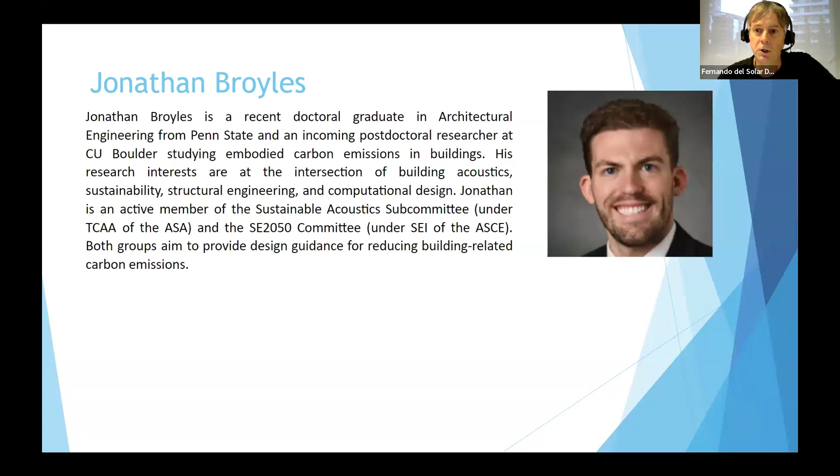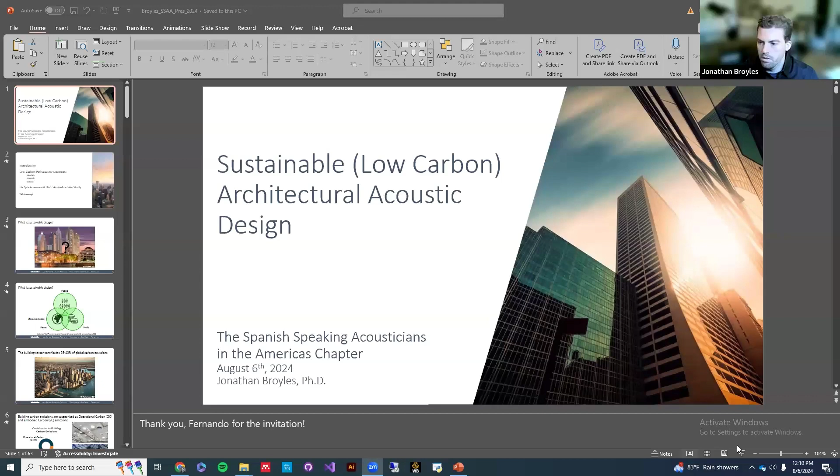I will stop sharing here. Okay, well, thank you so much for having me. I'm going to go ahead and get the slideshow on. You guys should hopefully be able to see the slide deck. So, good afternoon, good morning, or good evening, depending on where you are. I'm happy to be presenting on sustainable, low carbon architectural acoustic design to you today. Again, thank you, Fernando, for the invitation.

So a little bit of an overview of what I'm going to be talking about with you guys today: I'll give a little introduction on what I mean by sustainable design and low carbon design. I'll then discuss a couple low carbon pathways for acousticians or acoustic engineers, whether through structural systems, building elements, building materials, or systems like mechanical systems or the facade and building envelope. I'll then talk about what life cycle assessment is, what I mean by LCA, and how we can actually use this method on a case study looking at floor assemblies. Finally, I'll give a few overarching takeaways from the presentation.

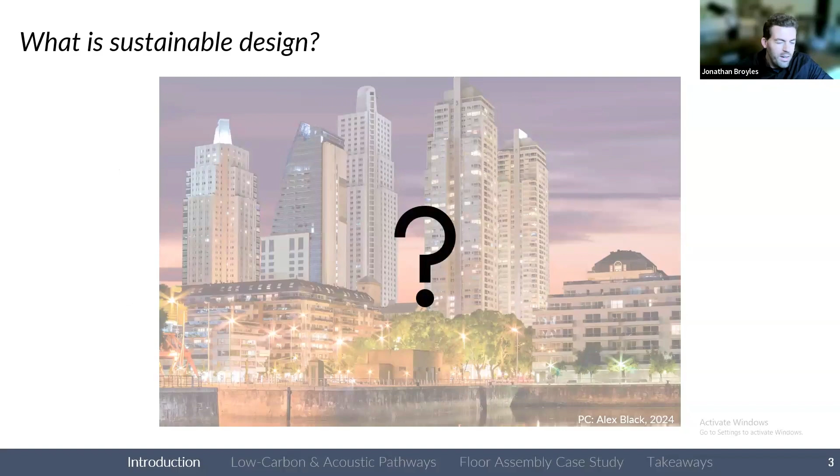So I don't know where your background is with sustainable design. You might be curious what exactly I mean when I say sustainable design. Sustainability with regards to the built environment aims to reduce the negative impacts on the environment, the health and comfort of building occupants or people, while ensuring an economical design.

Sustainability has three core pillars, known as the triple bottom line, or the three P's: to help the people, help the planet, and gain a profit.

I first want to mention that acoustic consulting was known to be a sustainable practice because it benefits people. People having acoustic problems would want to talk to an acoustician to make sure people aren't inadvertently affected. But by and large, a lot of people are now focusing on decarbonizing the planet—not to disregard people or profit, but there's a bigger push on trying to reduce building carbon emissions.

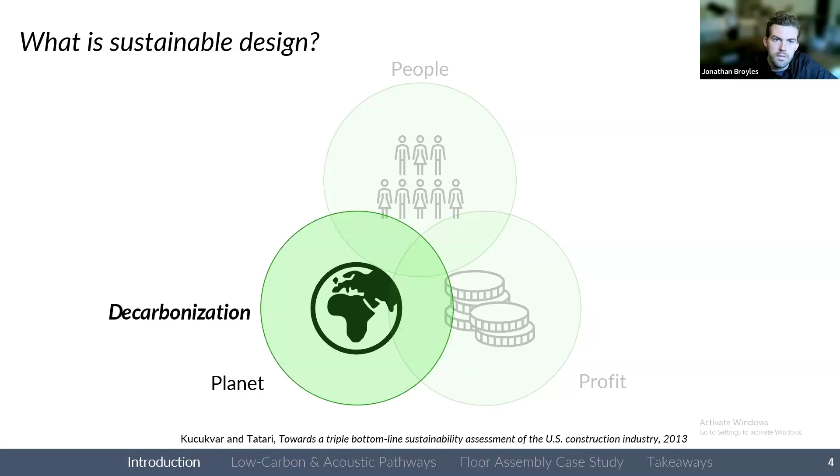That's because the building sector, and specifically the architectural, engineering, and construction industries, contribute between 35 to 40% of global carbon emissions. And there's a pretty big global climate crisis. So as building designers and practicing acoustic engineers, we have to figure out ways to curb the carbon emissions of our buildings.

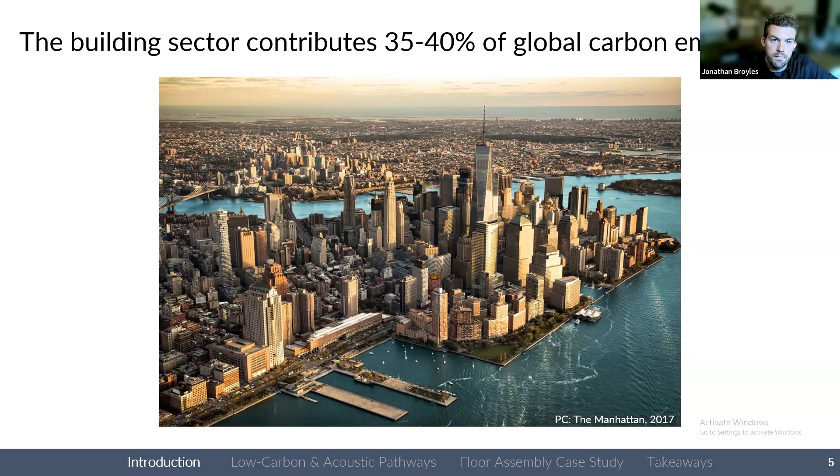To break this down, building carbon emissions are typically categorized as operational carbon emissions and embodied carbon emissions. Operational carbon emissions are associated with any carbon emission connected to keeping the building lights on or keeping the building in use—keeping the mechanical system running, having the lights on, and typical day-to-day operations.

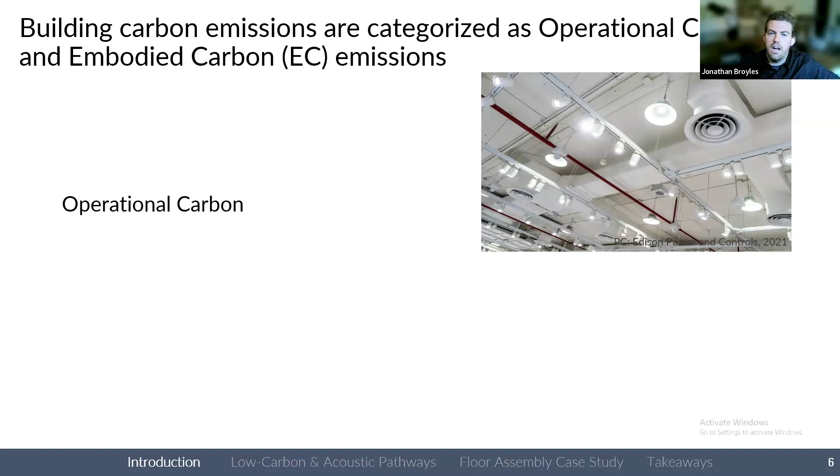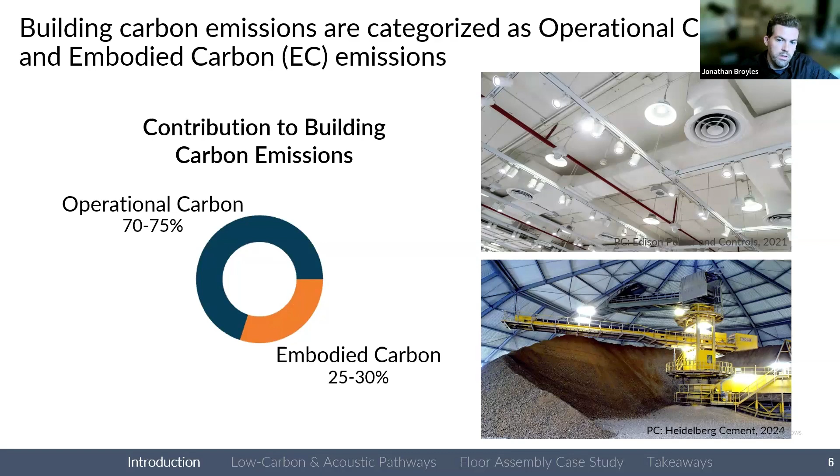Embodied carbon emissions are essentially the carbon emissions from material extraction, transportation, and manufacturing of building materials, such as concrete, steel, wood, or even plastics. Typically, the contribution to total building carbon emissions is about 3/4, or up to 75%, connected to operational carbon. The remainder is associated with embodied carbon emissions.

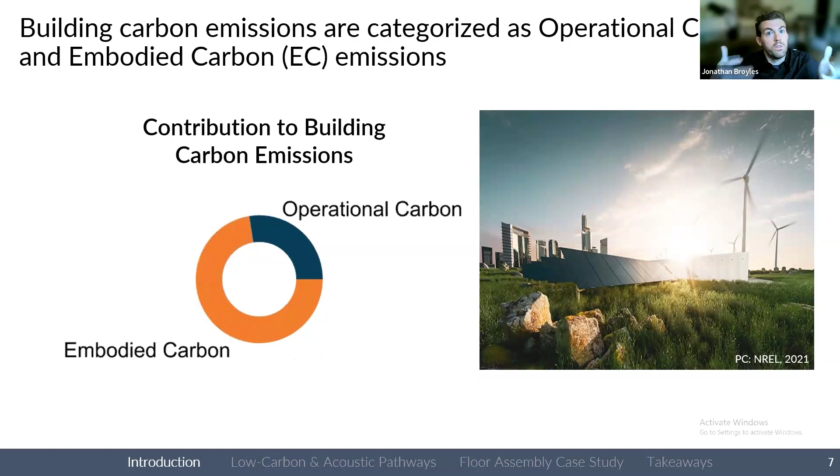Especially in places progressing towards renewable energy sources, with greener electrical grids, it's projected that the contribution to embodied carbon emissions will change, becoming a bigger piece of the pie, so to speak, because operational carbon emissions are going to be, in quotes, greener. So as designers, we have to be aware of trying to reduce both operational and embodied carbon emissions.

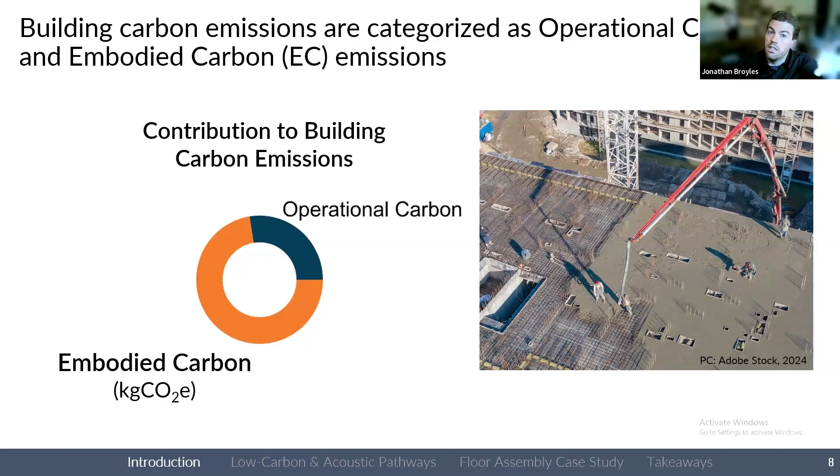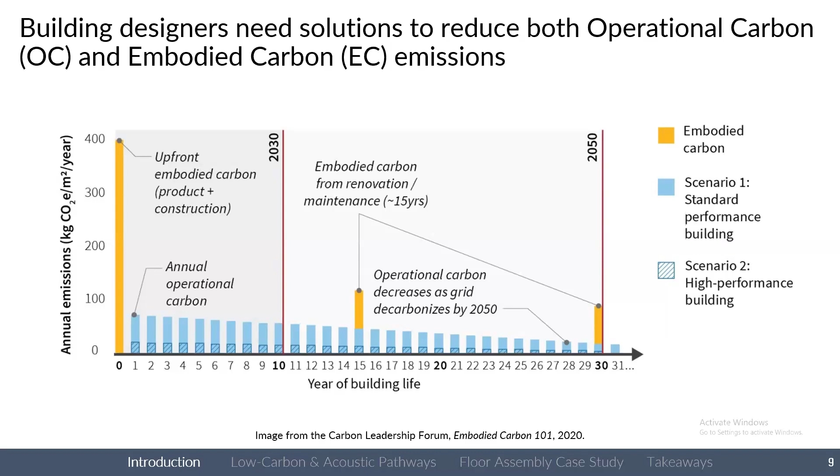Typically speaking, we have a lot of different carbon emissions to consider in the design of a building. There are carbon dioxide emissions produced at every building life cycle stage. Typically when we think of reducing carbon emissions in buildings, we're focused on operational carbon emissions, but in reality, we have to think about the materials and products we're using as well.

Hi, Fernando. Did I get cut off? Hopefully not. You did not. Okay, perfect. I just saw a little blurb come up, but okay, good.

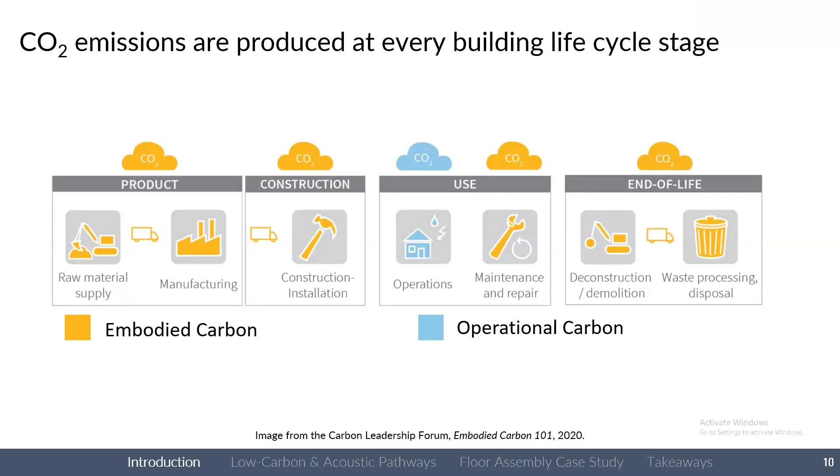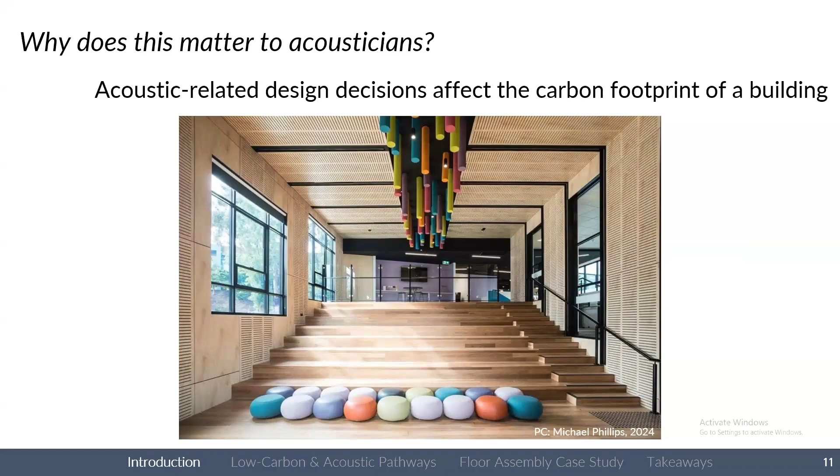So why does this matter, specifically to acousticians and other practicing building designers? That's because acoustic related design decisions can affect the carbon footprint of a building, whether that's how we specify building finishes or different floor assemblies, or specifying acoustic baffles in certain places, or the design of our HVAC system. All of these design decisions have carbon consequences, whether good or bad, so we have to be very aware of the carbon footprint related to those design decisions.

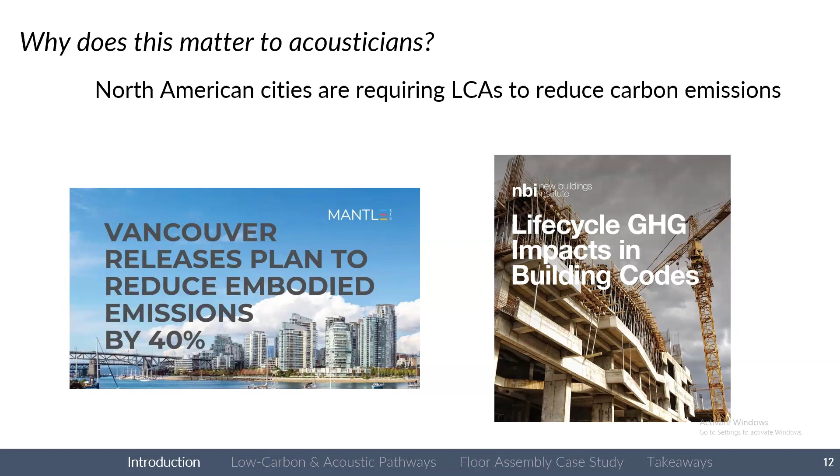So I'm going to shift gears a little bit, given that motivation, to some practical strategies—a bit more academic and innovative—pathways to reduce embodied carbon emissions and operational carbon emissions in buildings. I'll start with strategies to reduce embodied carbon emissions first.

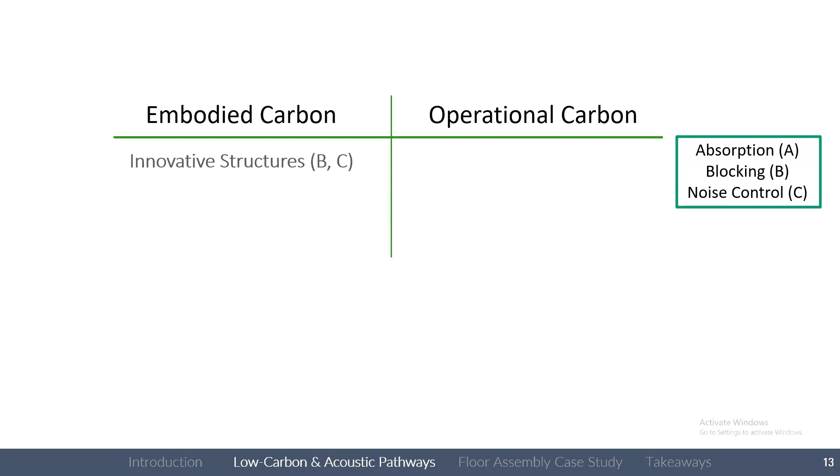These include innovative building elements or structural systems, including green roofs—I'm sure people on this call are pretty familiar with green roofs. Mass timber building structures are becoming very mainstream across the world, and even geometrically optimized elements are a strategy to reduce building embodied carbon emissions.

Moving on to operational carbon, designing very carbon-efficient systems, including high-performing building envelopes and optimized mechanical systems, is a pathway to reduce our operational carbon emissions.

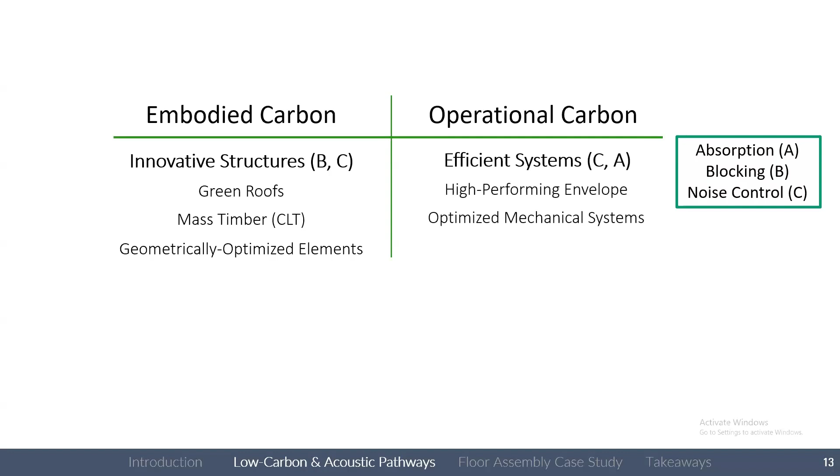There's also a mix of benefit when specifying sustainable materials—that could be material-optimized structures, getting into the material science of a specific construction material, specifying greener conventional construction materials, and even using natural, especially local biogenic materials. That's a very good pathway to reduce carbon emissions in buildings.

Depending on what type of pathway you select, that has a direct effect on how well you're absorbing sound in a building, how well you're blocking sound, or what type of controls you have in terms of the acoustic system in your building.

That's one reason mass timber floors are becoming a mainstream solution to reducing embodied carbon emissions in buildings in many countries. Something to be aware of though—as acousticians, we know mass timber floors, especially without other material layers applied, don't have the best acoustic performance. However, it's a very sustainable design solution.

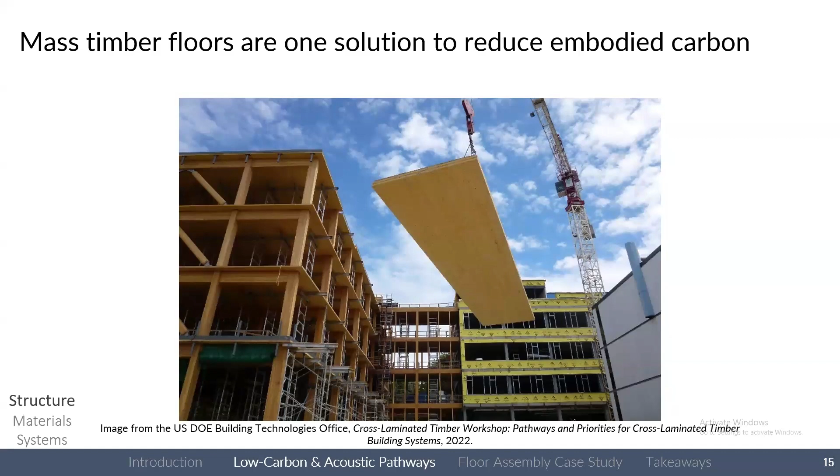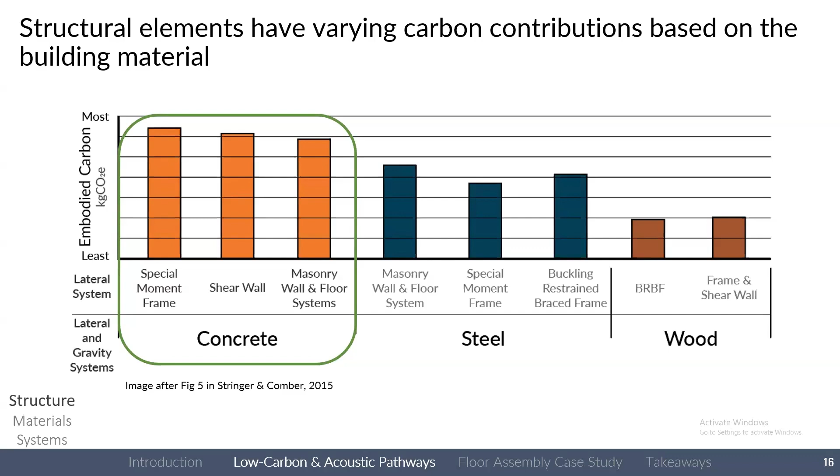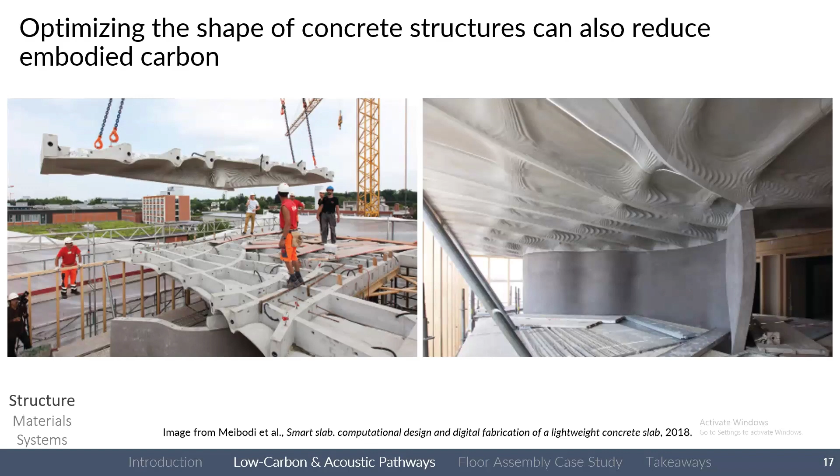Another pathway is to optimize other structural systems, including concrete systems. There's been a lot of research on optimizing the shape of concrete structures or elements in buildings without sacrificing their structural integrity. These pictures show a 3D concrete printed floor slab implemented in a building design—the benefit is much less concrete in the floor compared to a conventional concrete system, thereby reducing embodied carbon emissions.

But depending on how much STC increase we need, that can affect embodied carbon emissions. There's a trade-off when reducing the mass density of a floor system, which can also affect the stiffness and damping of the floor, thereby affecting sound insulation performance.

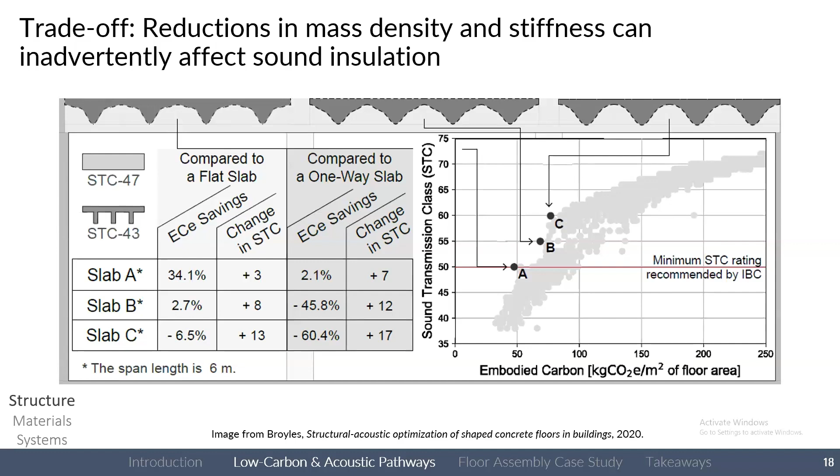So you have to be very aware when you're doing this pathway, and I know this is more scientific, more advanced, when actually specifying these optimized floor systems in building design. I know these systems aren't super mainstream yet, but there are tests being done, and I've done some of them. There's also startups coming out with these types of floors that can reduce the carbon emissions of a building, but can sometimes have a benefit to the acoustic performance, or inadvertently affect it. So as designers, we have to be pretty aware of this when implementing them in building design.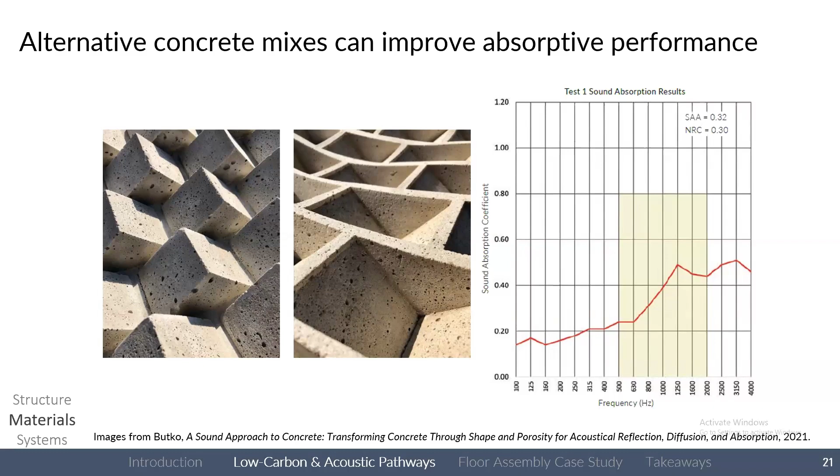Stepping away from concretes, natural, local biogenic materials can really help reduce the carbon footprint in your building while also improving acoustic performance. Some of this isn't new to you guys, or shouldn't be. Using construction materials like straw bales, compressed earth blocks, cork, and hempcrete can all have benefits when reducing carbon emissions while also improving acoustic performance, like having higher absorption in your building. So definitely look to try to implement these.

And I know it could be very much case dependent. Maybe you have a residential building, natural local biogenic materials might be a great option for you, but for other multi-story buildings, maybe it's a little bit harder to implement this strategy or pathway.

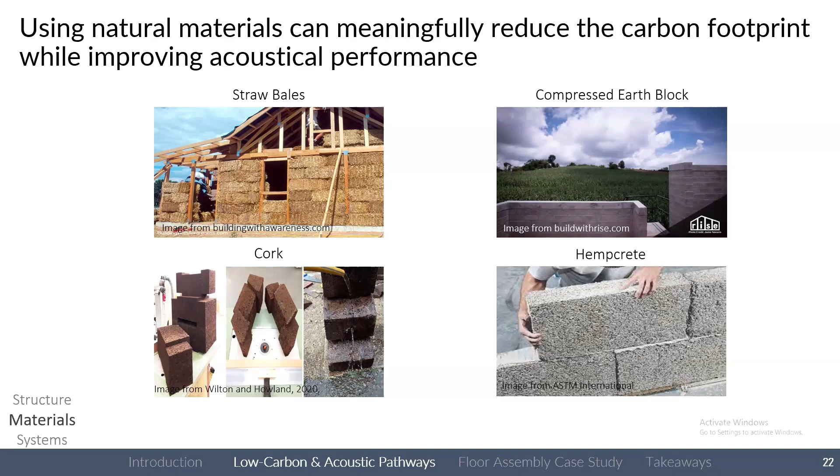One important trade-off when implementing local biogenic materials is that sometimes there are construction limitations with these. There's also degradation issues, meaning depending on if it's potentially in a fire-prone area, or if there's a lot of water that it would be exposed to. These are things to very much be aware of because that can ultimately affect the life safety and quality of your building. So not only do you want something that's low carbon and acoustically viable, you want to make sure the material is safe and there wouldn't be any life safety consideration with it.

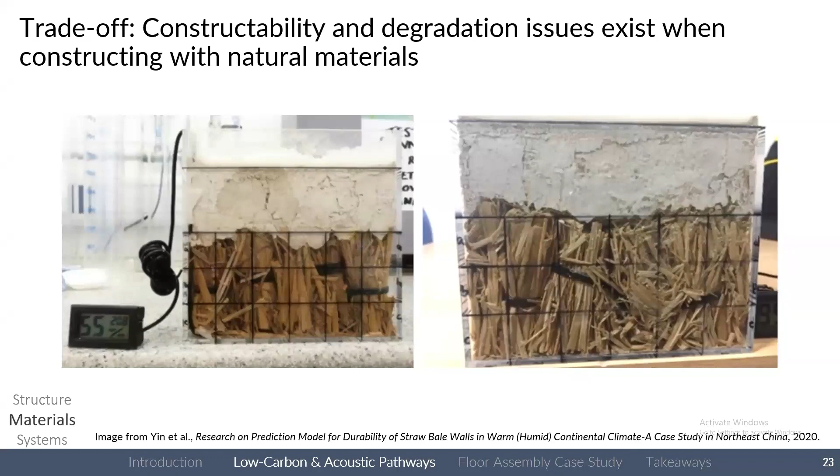Moving on to systems, I mentioned high performing building envelopes, and that really comes down to windows. If anybody is familiar with double pane and triple pane windows, hopefully there are a few consultants here on this call familiar with those, there's not only an acoustic benefit, but there's a pretty big operational carbon benefit as well.

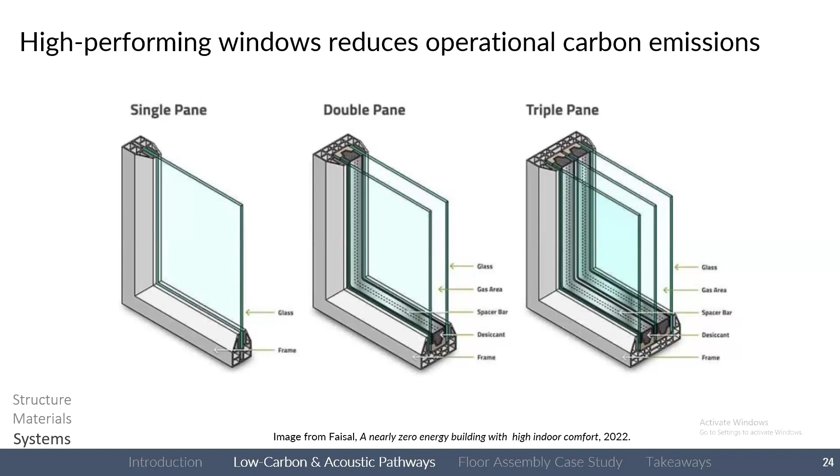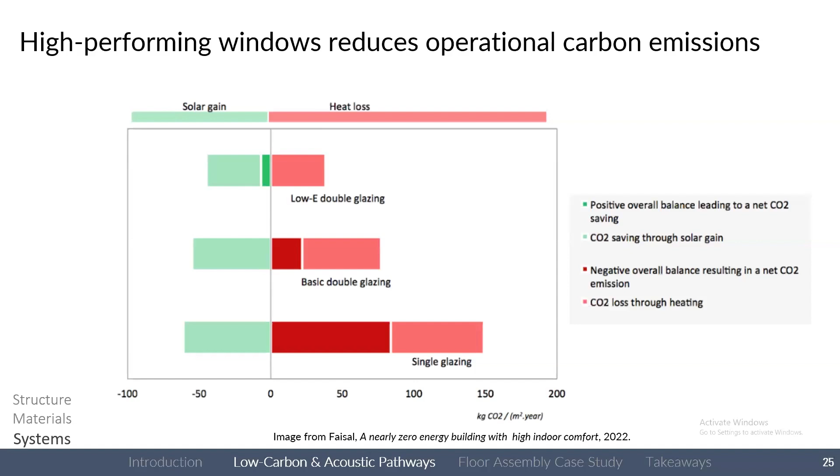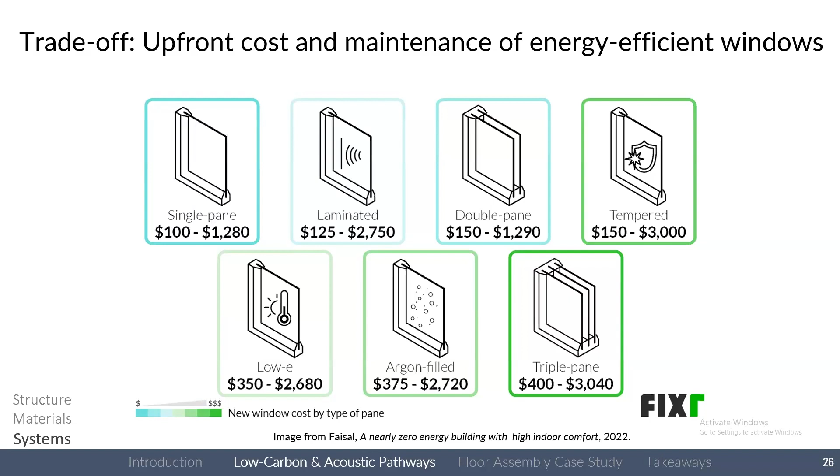Now, the trade-off with these types of windows, or higher, more efficient envelopes in general, is there's generally a larger upfront cost connected or associated with windows or even better, more energy efficient mechanical systems. There's also potentially more maintenance involved with the upkeep of these systems. You can see here pretty clearly, double and triple pane windows are a little bit more expensive. The double is not too bad, but the triple is when you really see a much larger cost.

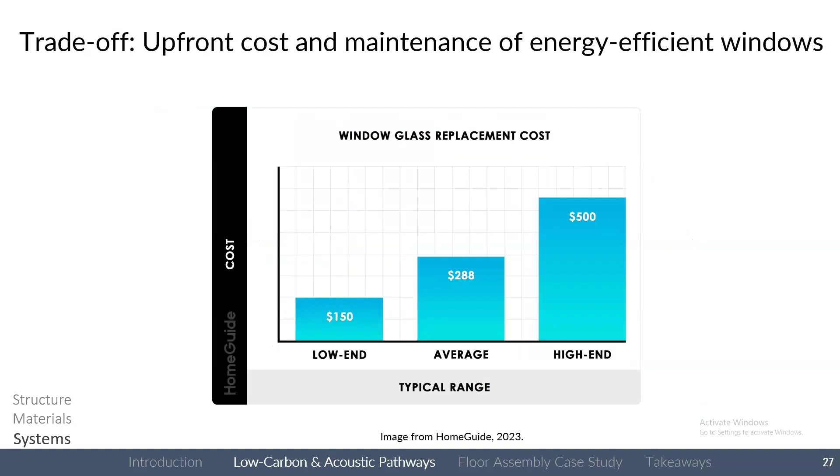And then again, the upkeep of these can be very high, especially depending on how many windows you have in your building design. Are they high end? All of that has to be considered when you're designing your building.

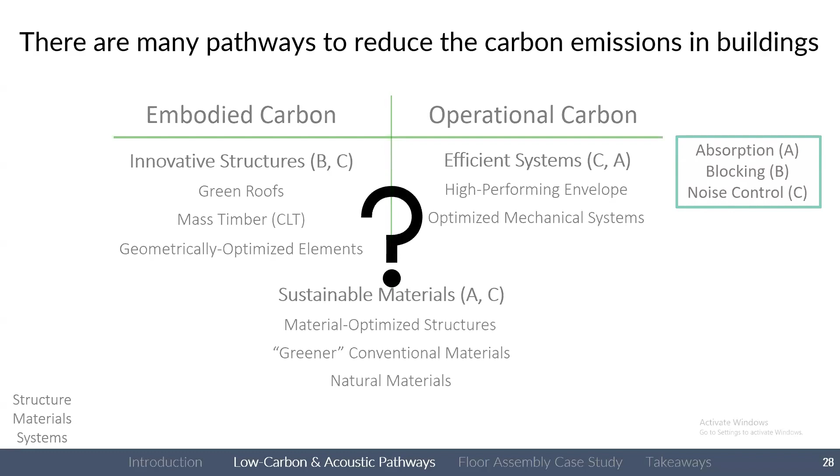So I'm going to pivot now after talking about all of these different pathways. Hopefully some of us are already familiar with some of these pathways even before this call, but hopefully all of us now have a few ideas of how to reduce building carbon emissions. But now I want to talk about how do we actually pick which solution is best and how do we know?

So I'm now going to give a short mini lecture on what is life cycle assessment, what is this method, and then actually demonstrate using a life cycle assessment to evaluate different floor ceiling assemblies for both their carbon emissions and their acoustic performance.

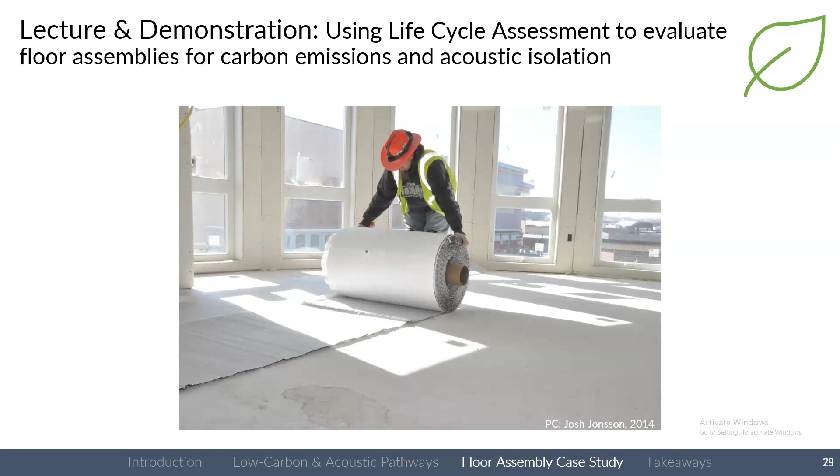Okay, so what is life cycle assessment? Maybe you've heard of it, maybe you haven't. This is geared for people who are maybe a little bit newer to this, a little greener. Life cycle assessment is a systematic method for evaluating a product's potential environmental impact throughout its life cycle. It's a method for actually giving a number to those embodied carbon and operational carbon emissions.

Life cycle assessments can be applied to a specific building product, a building assembly like a floor ceiling assembly or a wall, and can even extend to a whole building. So you can do an LCA on a full building. Lots of different scales with this.

Life cycle assessments almost always follow the ISO standards 14040 and 14044, which if you're not familiar with, I encourage you to look them up or reach out to me and I can point you to those standards. Those kind of set the foundations for what a life cycle assessment is.

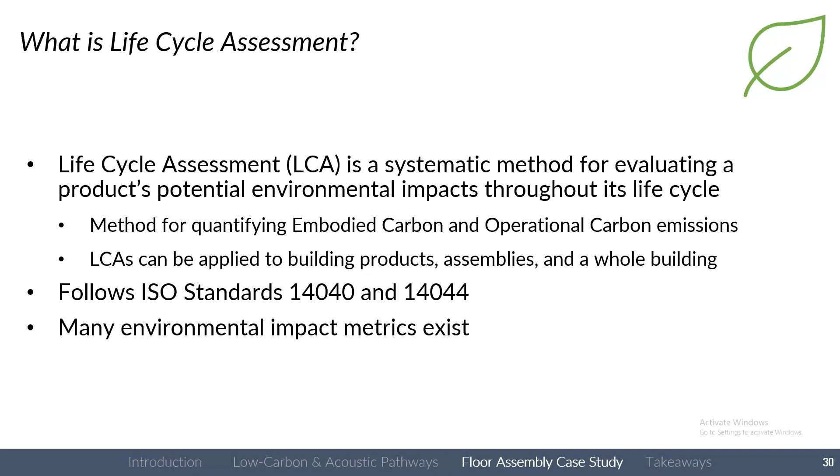It's worth noting that there are several environmental impact metrics out there. LCA is a way to quantify these environmental impacts, but there are multiple impacts we could quantify. Typically though, for building designers, we're most interested in global warming potential because this metric is typically used to quantify climate change, specifically global climate change.

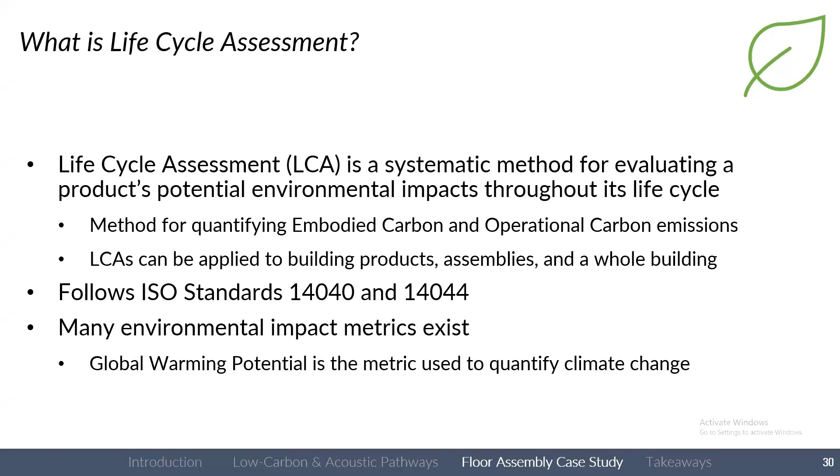So what is global warming potential? I'll dive in a little deeper. Global warming potential is this environmental metric that measures or quantifies how much infrared thermal radiation a greenhouse gas absorbs in the atmosphere over a specific time period.

That sounds very scientific, I know, but essentially global warming potential normalizes what would be called this global warming effect of many different gases relative to carbon dioxide, which is used as the reference gas. So you will see in this environmental metric that GWP is measured in kilograms of carbon dioxide equivalents, kilograms of CO2e. That's essentially the unit we use to quantify global warming potential, to just gauge how bad our design is for the climate, for global warming.

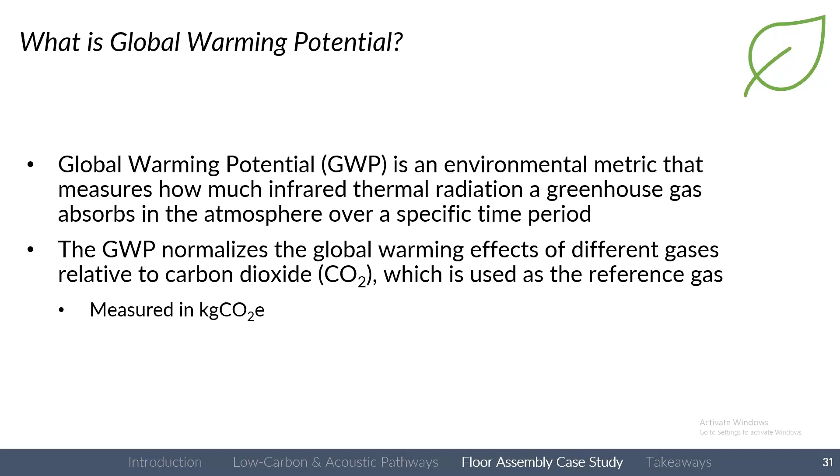So what are the steps to conduct a life cycle assessment? The first is to actually determine the goal and the scope of it. It could be that we're just focusing on understanding the carbon emissions associated with this floor ceiling assembly, or like I mentioned before, maybe we want to know the carbon emissions of an entire building. So obviously a very different goal, a very different scope as well.

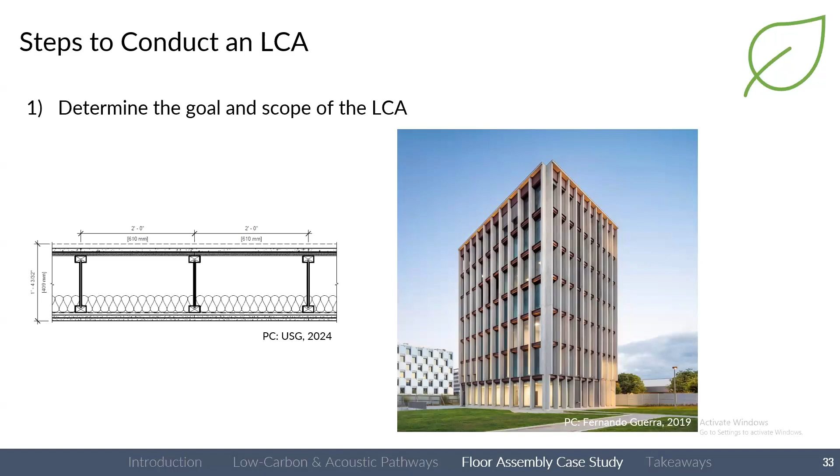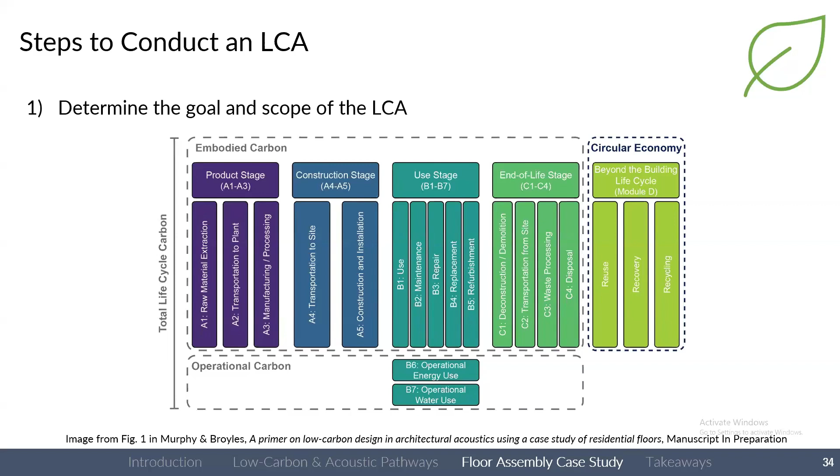To that end, we have to also consider all of these different life cycle assessment stages. I'm not going to talk about them in detail now, but the premise is there are carbon emissions associated with all these different stages in a building's life cycle, whether that's the product stage associated with material extraction, manufacturing, to actually constructing the building itself, to the building's use phase, and then end of life stages as well. Knowing what LCA stages you have to consider would be defined in the scope of your life cycle assessment.

So once you define that goal and scope, you would then need to obtain a bill of materials. And I hopefully haven't scared people away from life cycle assessment. It's really not too bad, and I'll give you an example why.

So you can see the bill of materials can really be extensive, especially if you expand the scope to a full building per se. There would be a lot of materials and things you'd have to account for in that LCA calculation.

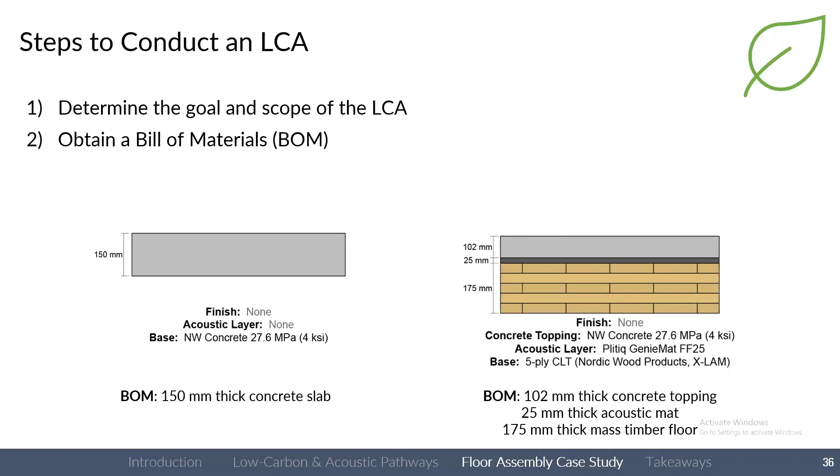So after you define the bill of materials, you would need to also obtain a life cycle inventory of carbon coefficients. Essentially, for every different construction and building material in your bill of materials, you would need to find a corresponding carbon coefficient.

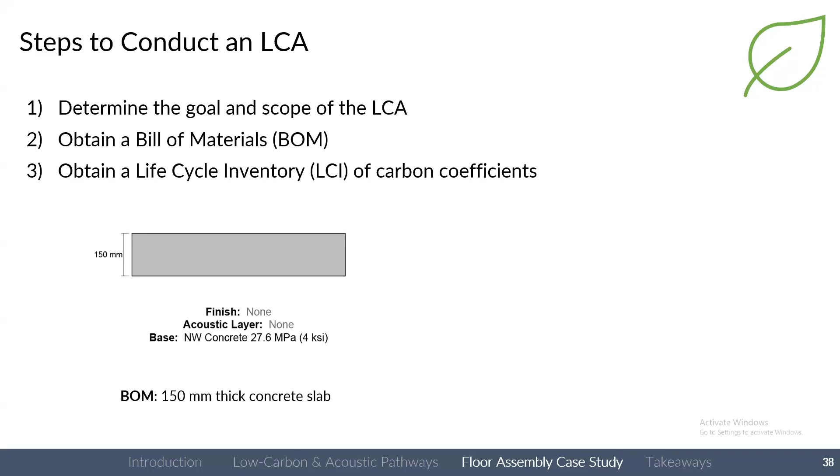Now, for those unfamiliar with this, you might be wondering, how do I get these carbon coefficients? There are several public and open source databases, and also generally a lot of public environmental product declarations for different building materials.

So I'm showing here a screenshot of a ready-mix concrete mixture environmental product declaration. This is essentially communicating its environmental impacts, kind of like the nutrition label on a food product. You see the benefits, you see the consequences, so on and so forth.

So just highlighting here, we have the environmental impacts on the right for a declared unit of a specific type of concrete mix at this plant in Newark, New Jersey, in the United States. Then you have a description of what it does, and the concrete compressive strength as well.

Underneath, it's important to know what is the unit, the declared units of all of the environmental impacts. And then below that, you have a list of 9 different environmental impacts that this EPD is providing. For our calculation, we just want to know the global warming potential.

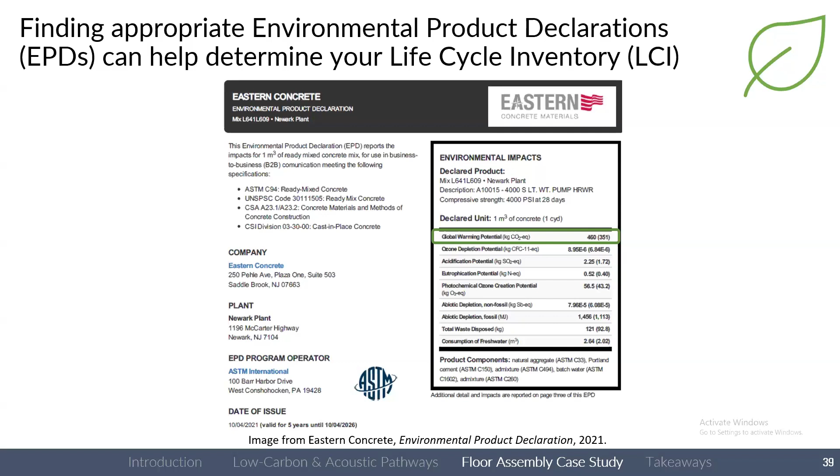Again, the GWP is used as the metric to quantify global climate change. So for 1 cubic meter of concrete, for specifically this concrete mixture, our global warming potential, or our carbon coefficient, is actually 460 kilograms of carbon dioxide equivalents per cubic meter.

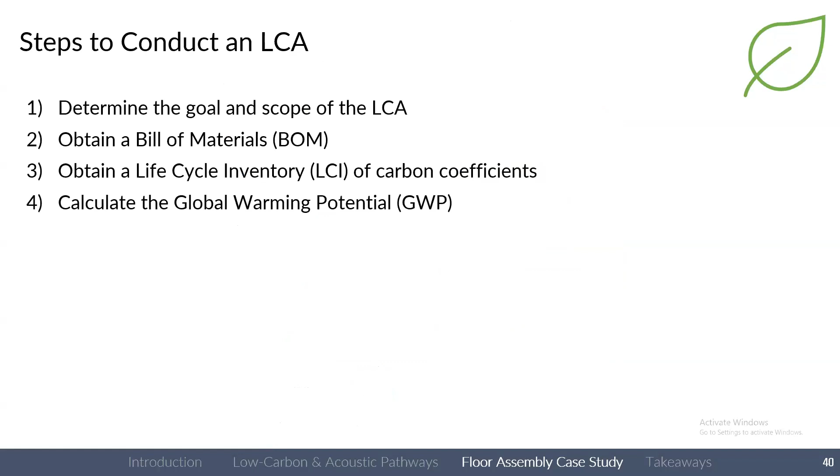So after you obtain the carbon coefficients corresponding to materials in the bill of materials, you would then calculate the global warming potential. For this example, the concrete floor example, we have the 150 millimeter thick concrete slab, and this carbon coefficient of 460, and we essentially just multiply that.

So per our 150 millimeter thick slab, times that by the carbon coefficient of 460 kilograms of carbon dioxide equivalents per cubic meter, which is the declared units, our floor assembly has a GWP, or an embodied carbon emission, of 69 kilograms of CO2 equivalent per floor area, per meter squared.

And the per meter squared is nice because that would essentially allow us to have apples to apples comparisons of floor assemblies, even if those floors had different areas. So hopefully that's clear to you. If not, I definitely welcome questions.

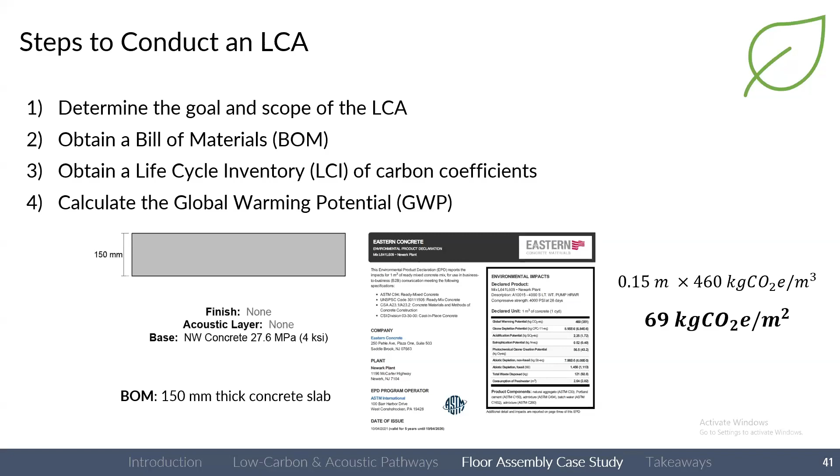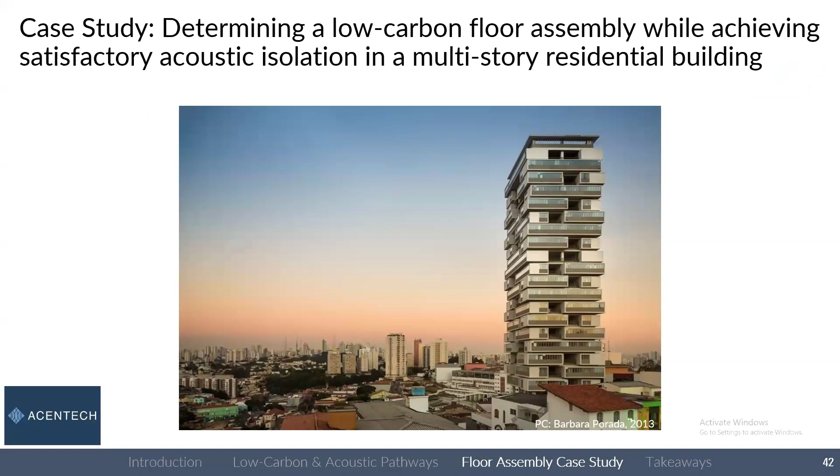But now I'm going to demonstrate this on a case study looking at different floor ceiling assemblies that satisfy acoustic performance while also minimizing carbon emissions for a multi-story residential building. This is in collaboration with the sustainability lead, Kristen Murphy at Acentech.

We use life cycle assessment to evaluate 9 different floor ceiling assemblies. You can see assemblies A, B, and C are all kind of these wood mass timber assemblies with different toppings and other layers.

Assemblies D and E are more concrete-based assemblies where it's more of just kind of this structural concrete floor, with assembly E having a few additional layers. And then assemblies F, G, H, and I are these steel composite systems with either additional flooring layers or even a hanging ceiling.

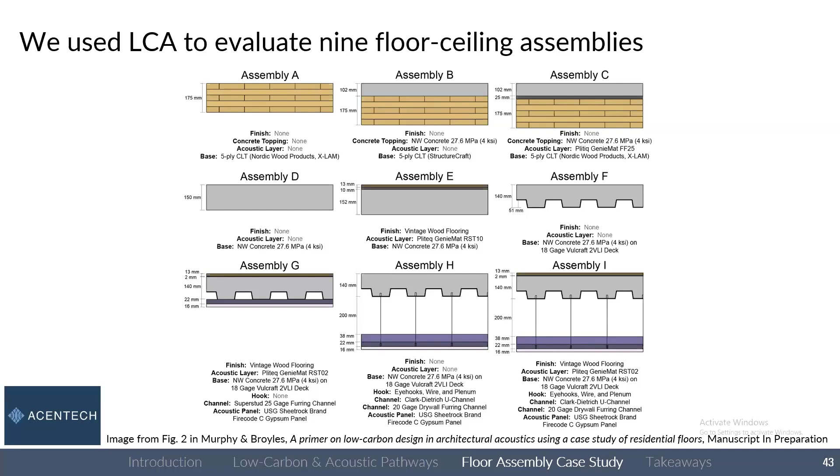So we looked at all these different materials and again had to find those bill of materials or material quantities in addition to those carbon coefficients to find the GWP or embodied carbon emissions for each specific assembly.

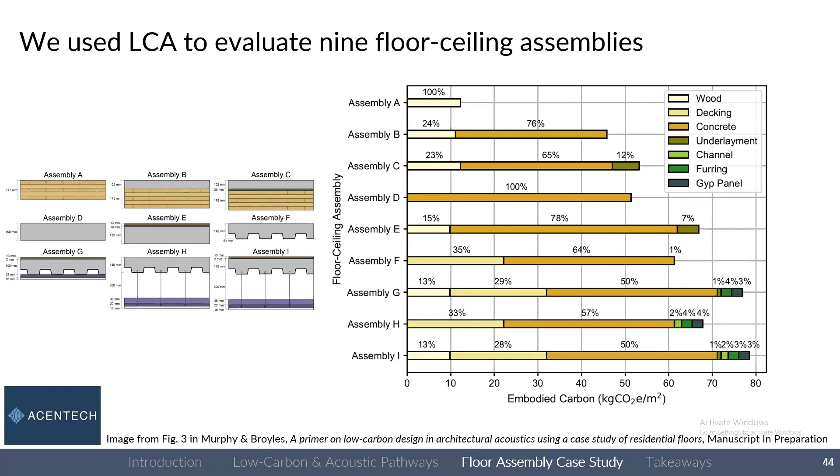Wood and wood decking is significant, but it's pretty clear looking at this chart that it's not of the same magnitude that concrete is. Lastly, all of the underlayments, channels, furrings, even the gypsum panels really contribute a very small percentage of embodied carbon emissions for each assembly—maybe a couple percent to 12% total, much smaller than the concrete or wood itself.

So we know assembly A is definitely the most sustainable, but definitely not acoustically viable. When we also look at these floors for impact sound insulation, using the impact insulation class rating, or IIC, we see there are now only 4 assemblies acoustically viable for both STC and IIC: assembly C, a mass timber-based floor; assembly E, a concrete-based floor; and assemblies G and I, steel composite systems with floor layers on top. These 4 floor systems would be acoustically viable, with assembly C having the lowest carbon emissions.

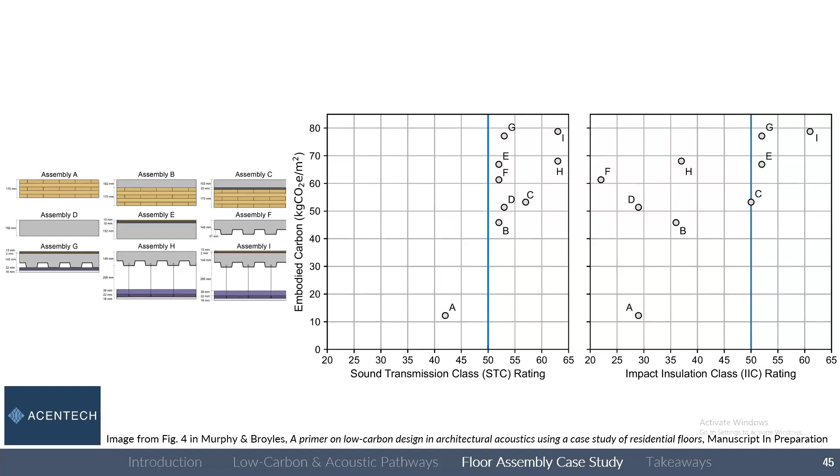So yes, only four floor-ceiling assemblies would actually be acoustically viable, but depending on your building needs, maybe assembly C would be best, or maybe assembly I would be best.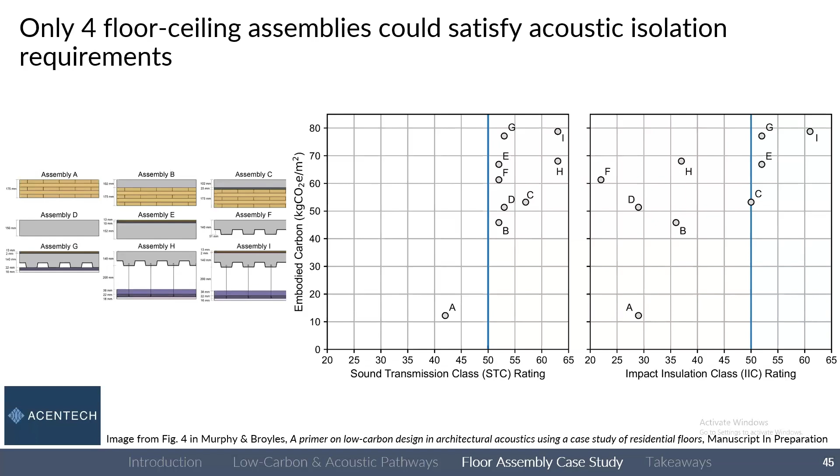So to start wrapping this up, why do these results matter? Building design is really being heavily influenced by low carbon design decisions, again trying to reduce that 35 to 40% of global carbon emissions. But what's important for us as acousticians to know is that the lowest carbon solution might have poor acoustic performance. So we have to be aware that we need to consider both of these design goals, and that they can compete with one another.

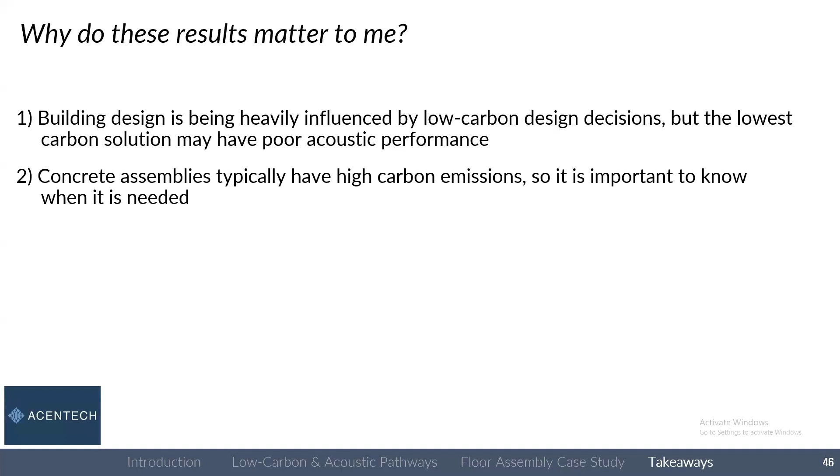Point two: concrete assemblies, as we've noted, have high carbon emissions. So as designers, we have to know when we need concrete, because sometimes it might just not be needed—very much something to consider in the design of your buildings and your acoustic practices.

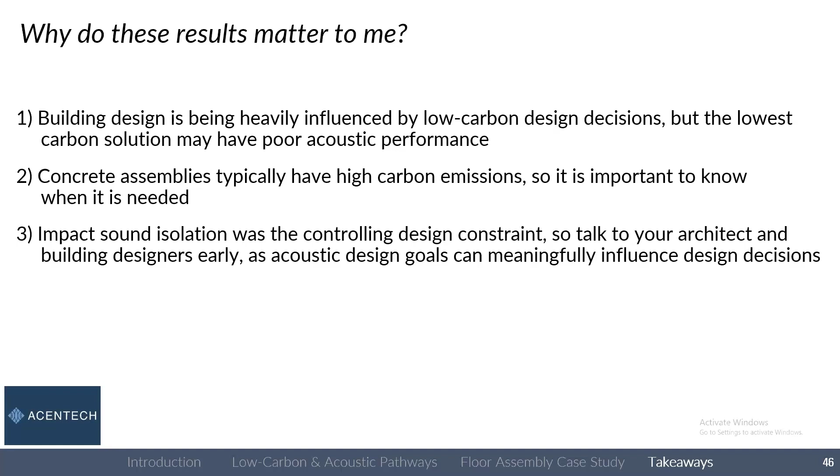Lastly, and I may have glossed over this, impact sound isolation in our case study was the controlling design constraint. So it's really important for practicing acoustic consultants to talk to your architects, your building owners, your clients, and other building practitioners early on, because then you can be part of making sustainable decisions without sacrificing acoustic quality or other building design goals. That's very important to remember from this talk.

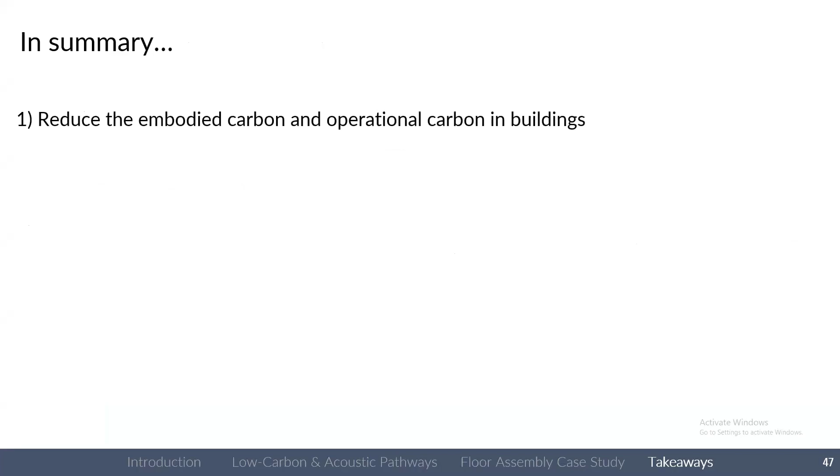So now, in summary, just a few high-level conclusions: it's imperative to reduce embodied carbon and operational carbon emissions in your buildings.

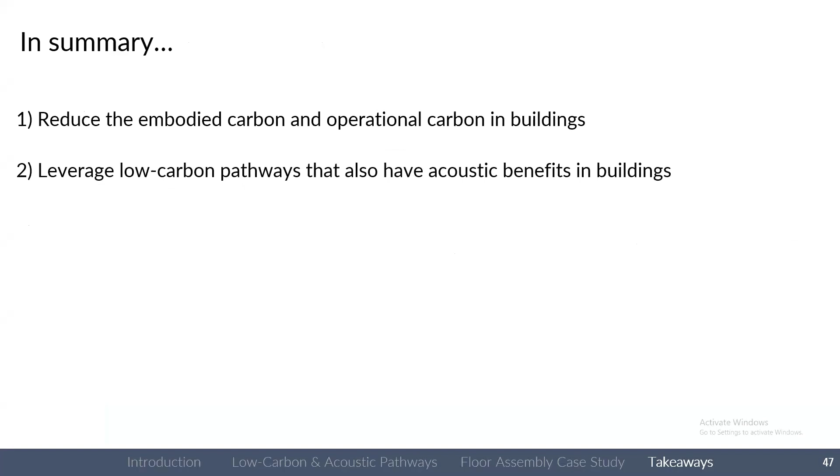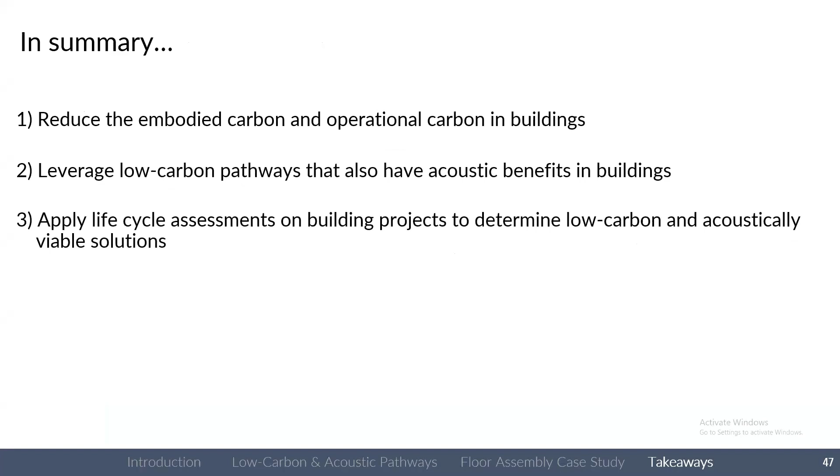Definitely start to leverage low carbon pathways in your design that also have acoustic benefits. And then start to apply life cycle assessments in your building projects, because that can help you determine what is both acoustically viable but also low carbon.